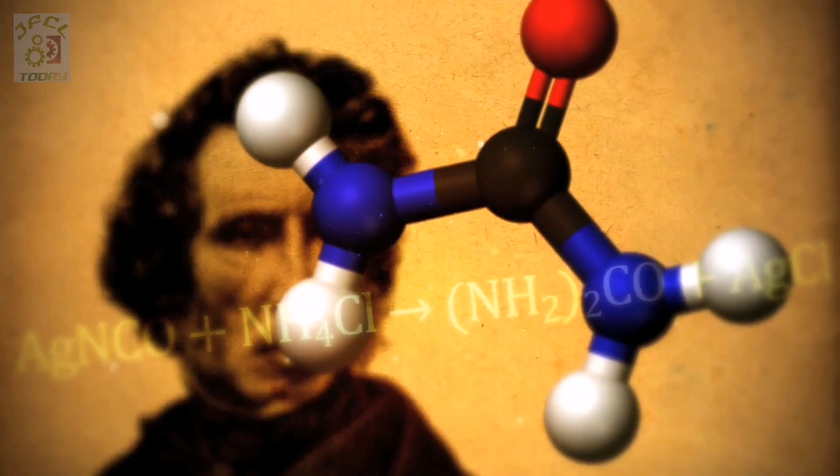In 1828, the German chemist Friedrich Wöhler obtained urea by treating silver isocyanate with ammonium chloride. This represented the first time that an organic compound was artificially synthesized without the involvement of living organisms. For this discovery, Wöhler is considered by many to be the father of organic chemistry.

BASF was the first company to produce urea on an industrial scale in 1922. However, corrosion of the steel equipment hampered the move to larger scale production. It was the Dutch DSM researcher Scheef van Waas who discovered that by adding a little oxygen to the ammonia-carbon dioxide mixture, the problem of corrosion was largely solved. This passivation procedure was patented in 1954. Hence, DSM's licensing arm, Stamicarbon, established its name in the urea industry.

Today, at around 170 million tons per year, urea is one of the world's most produced chemicals. Around 90% of the world's urea is used to fertilize soil for agriculture, and more than a third of all food grown in the world is grown from soil fertilized by urea.

Global demand for urea is growing at an average of more than 3%, higher even than the rise in global population. The available arable land, however, has not grown since 1960, yet the average crop yields per hectare have increased greatly. In fact, the average cereal yield per hectare in Europe has tripled since 1960, in large part thanks to fertilizers like urea. Furthermore, the growth of non-food applications for urea has also boomed in recent years.

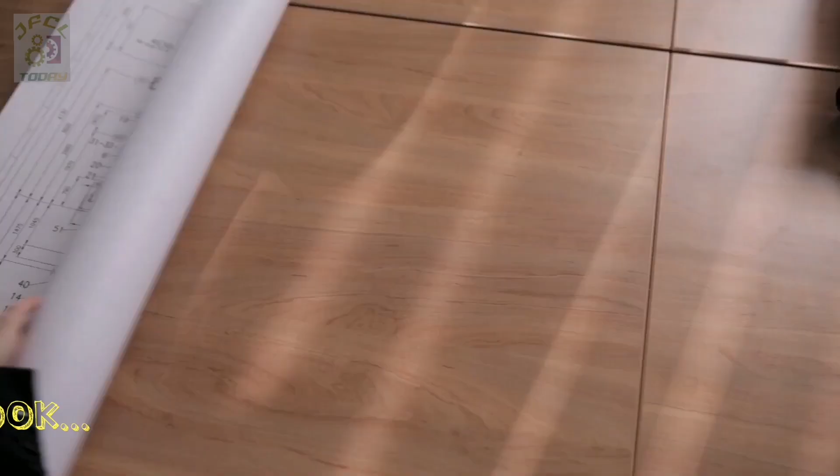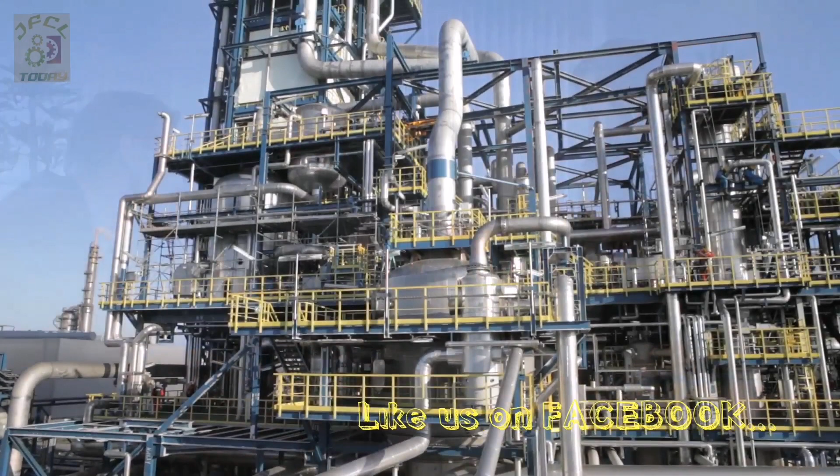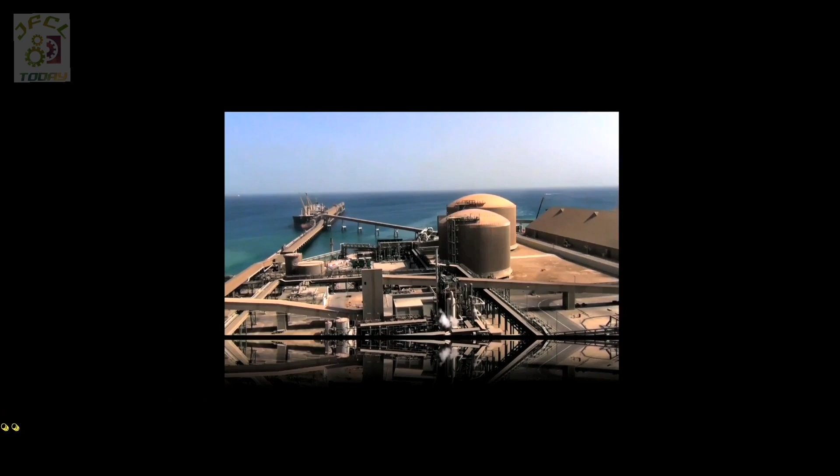Stamicarbon is the global market leader in the development and licensing of urea technology. With more than 50% market share, we deliver technologies and services to all of our customers worldwide. One activity is the licensing of new urea plants, providing the urea producer with knowledge and resources to build a reliable, state-of-the-art, low-cost and profitable urea plant that requires minimal staff to operate. Another activity is revamping or debottlenecking existing plants, along with improving efficiency and reliability.

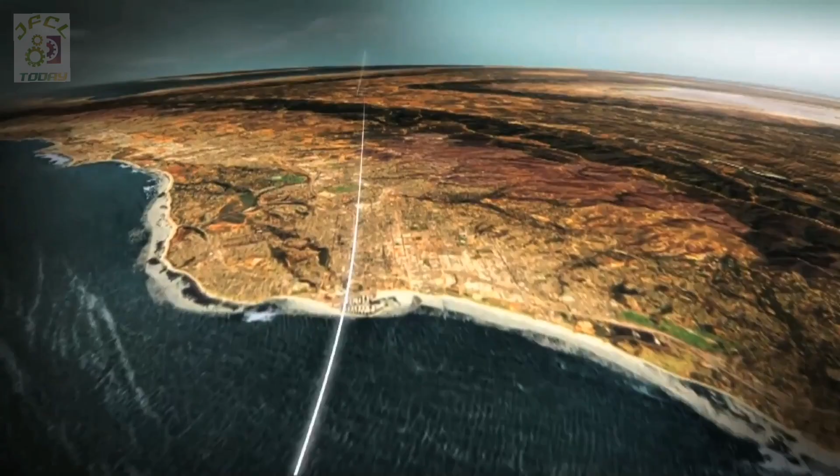Stamicarbon was established in 1947 as the licensing subsidiary of DSM. In 2009, the company was acquired by Maire Tecnimont, which is an engineering, main contracting and technology licensing group. Maire Tecnimont operates worldwide in the oil and gas, chemicals, fertilizers, petrochemicals, power, renewable energy and infrastructure sectors. The group has 5 different companies. Of course, one of them is Stamicarbon. The other 4 are Tecnimont, Tecnimont KT, Tecnimont Civil Construction, and Met New Energy.

Headquartered in Milan, Italy, Maire Tecnimont has over 50 operating companies in more than 30 countries and employs some 5,300 employees. Stamicarbon is the licensing and IP center of the Maire Tecnimont Group. In 2010, we established the Maire Tecnimont Innovation Center, which is responsible for the innovation within all the different companies of the group and steers the research and development in these companies.

Stamicarbon's main office is in Sittard, the Netherlands. The company also has offices in China and Russia and uses representatives and the sales offices of the Maire Tecnimont Group. The company has more than 65 years of licensing experience and has licensed various technologies to more than 1,000 companies in about 80 countries worldwide. Stamicarbon has licensed over 250 urea plants located in more than 50 countries and has completed over 90 revamp projects in both Stamicarbon and non-Stamicarbon plants.

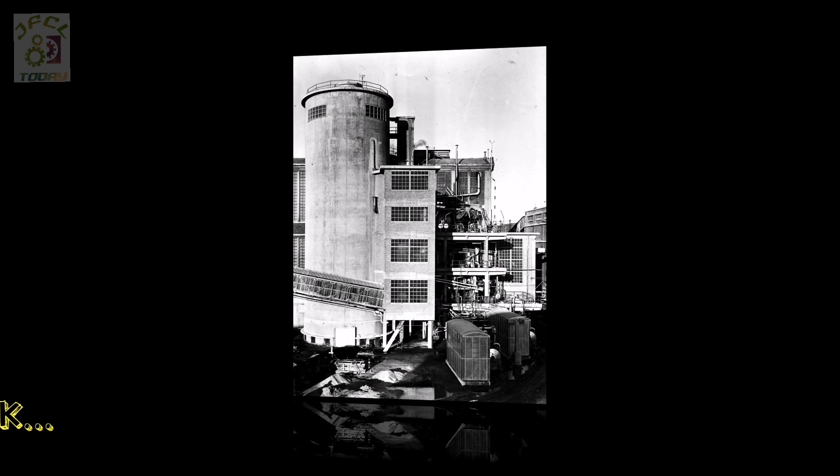Whereas in the 1950s, plants could be built for capacities as small as 50 tons per day, these days plants are typically built for capacities in the range of 3,000 to 4,000 tons per day. All projects entail customized solutions, with the choice of several licensing models and EPC supply scopes, meeting the diverse requirements of our customers.

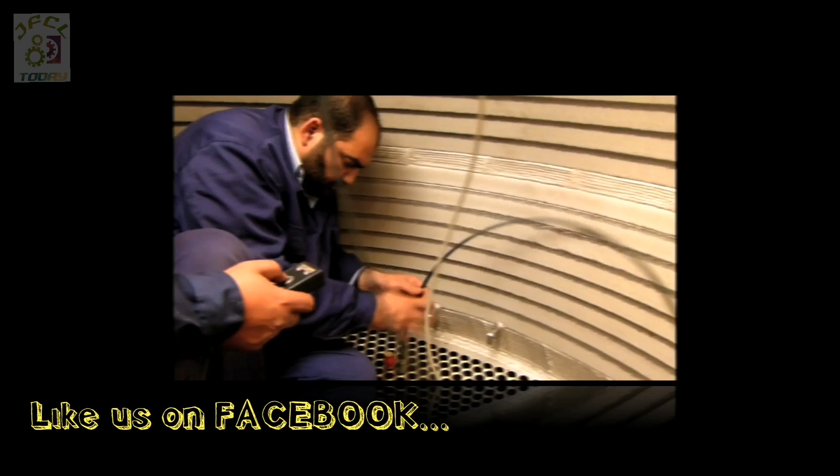I think that if you ask for one particular distinguishing feature that we have in our company in comparison with our competitors, then it would be the commitment that we have towards full life cycle support. Full life cycle support covers an array of services, including plant operation support, plant troubleshooting and optimization, studies and execution of revamp and debottlenecking projects, equipment inspections, and plant staff training.

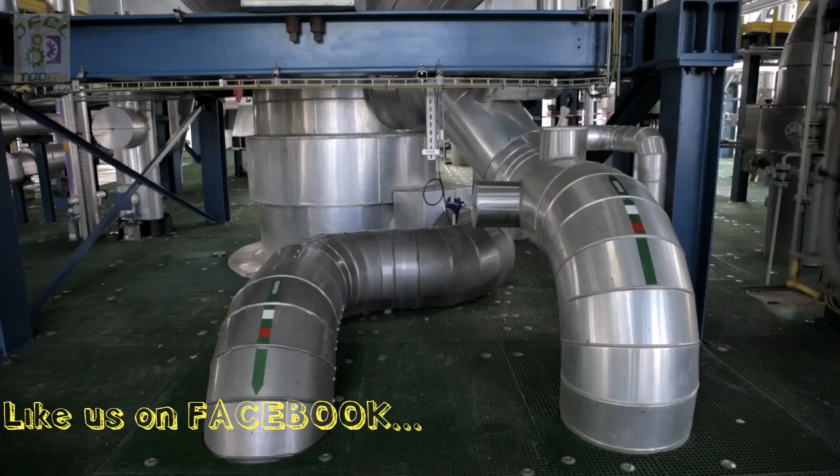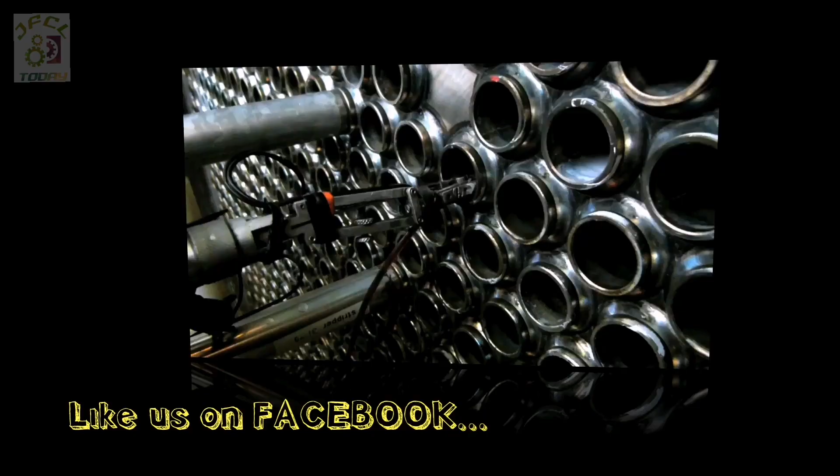Reliable equipment is very important for successful urea production, and Stamicarbon's expertise in design, engineering and the manufacturing of high pressure equipment in the field of urea production has led to the development of Stamicarbon stainless steel. This stainless steel is developed dedicatedly for the use in high pressure synthesis sections in urea plants.

Since Stamicarbon's formation, innovation has always been part of the company's DNA. Stamicarbon has been a constant frontrunner with a series of innovations, most notable of which are CO2 stripping technology, Urea 2000 Plus technology, Avancore technology, fluid bed granulation technology, and Stamicarbon stainless steel.

Many innovations take place in close collaboration with Stamicarbon's customers, suppliers, and contractors. It's not that we do these innovations all by our own. We work closely together in our innovation efforts with suppliers, EPC contractors, and our customers as well.

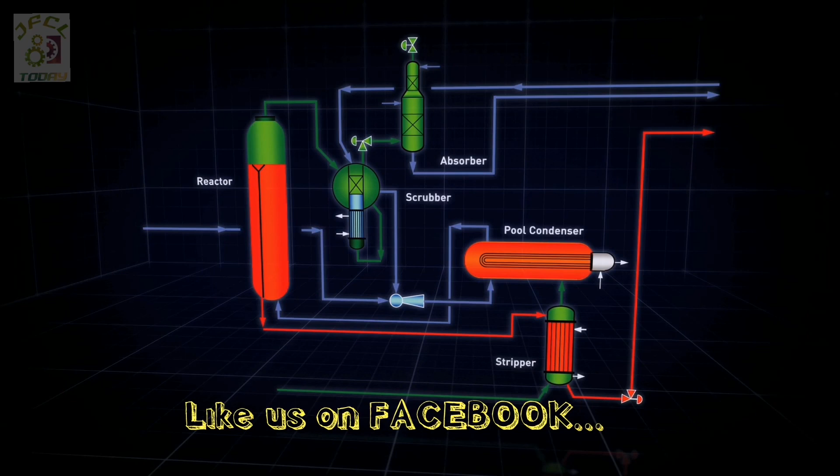The CO2 stripping technology, developed in the 1960s, was a major breakthrough in urea technology, almost halving the energy consumption of urea plants. The next major innovation was the development of the Urea 2000 Plus technology, featuring a pool condenser or pool reactor as a centerpiece.

Pool condensation entails superior heat transfer and easier condensation, taking place inside the same equipment, where further reaction to urea happens. Urea 2000 Plus limits the number and sizing of high-pressure equipment and piping used in the synthesis section of a urea plant, simplifying both the design and construction and leading to a considerably lower investment.

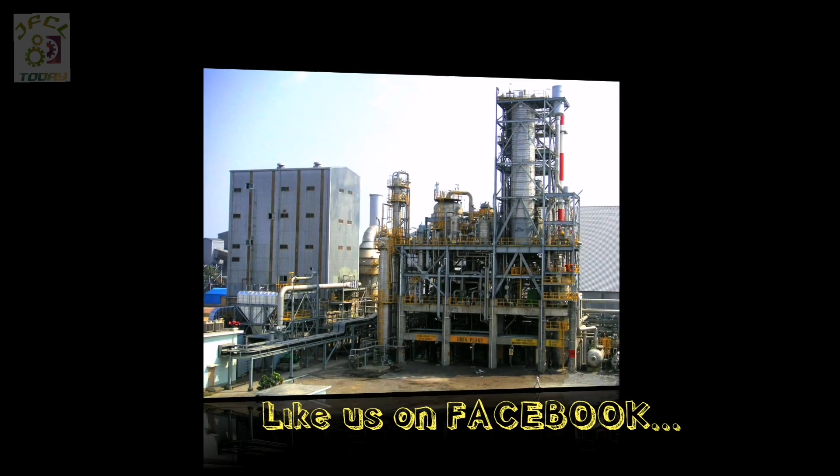In cases where a Urea 2000 Plus plant features a pool condenser, the total plant height is reduced to a mere 42 meters. In 1994, the first pool condenser was successfully commissioned at the KAFCO plant in Bangladesh.

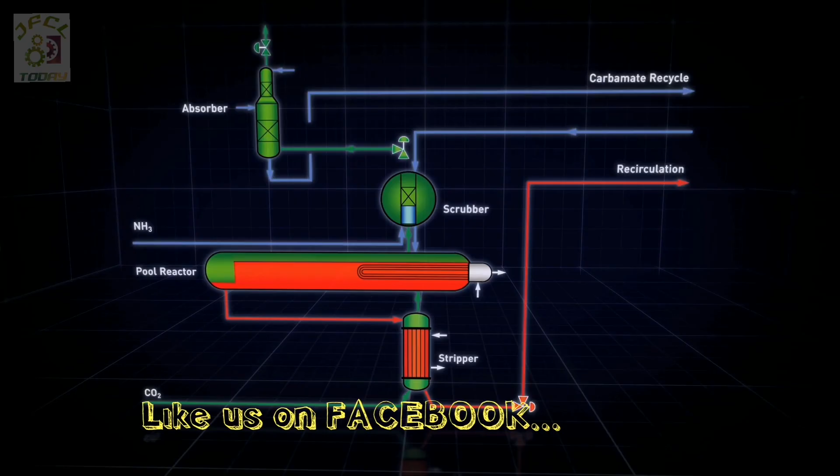Where a Urea 2000 Plus plant features a pool reactor, the condenser and reactor are combined in one single vessel. This is achieved by enlarging the horizontal condenser to create additional reactor volume, achieving sufficiently high residence times and eliminating the need for a separate vertical reactor. This way, the total plant height is decreased to a mere 30 meters.

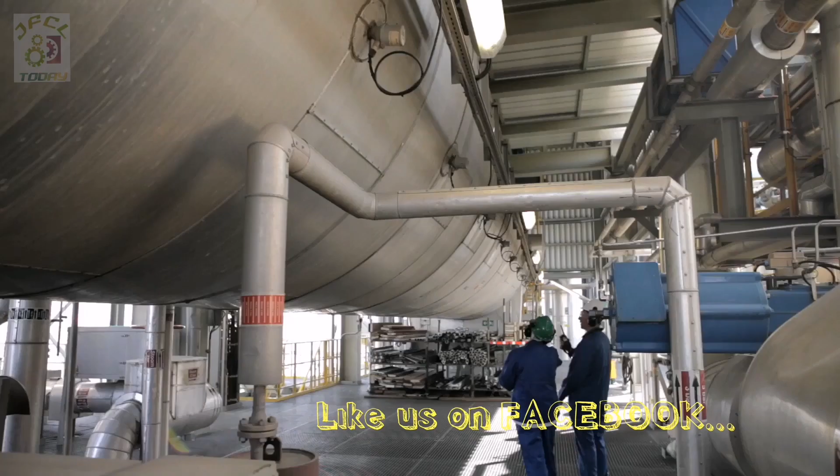In 1998, the first pool reactor was successfully commissioned at the former DSM plant, now owned and operated by OCI Nitrogen in Geleen, the Netherlands.

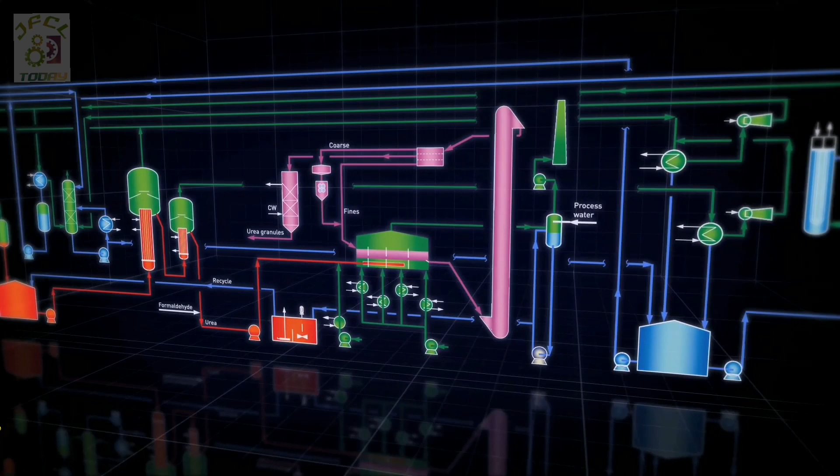Stamicarbon's latest development in urea technologies is the Avancore technology, which comprises all the benefits of the Urea 2000 Plus technology and experiences gained from revamp projects, around a low elevation layout of the synthesis section and a reduced pressure inert washing system.

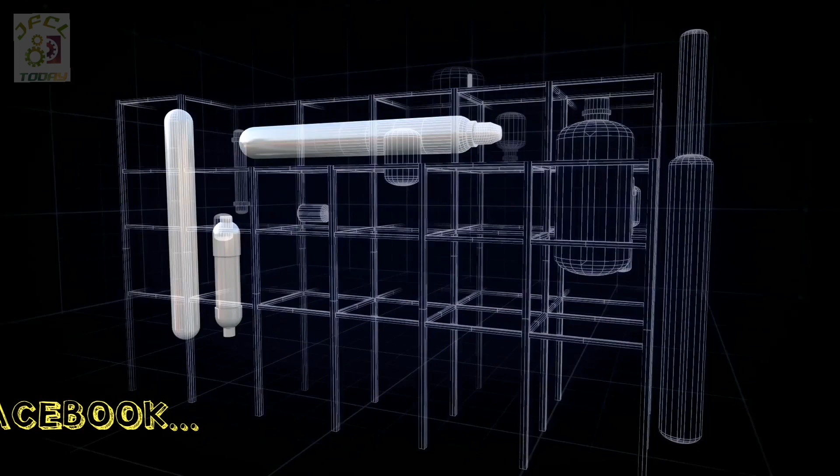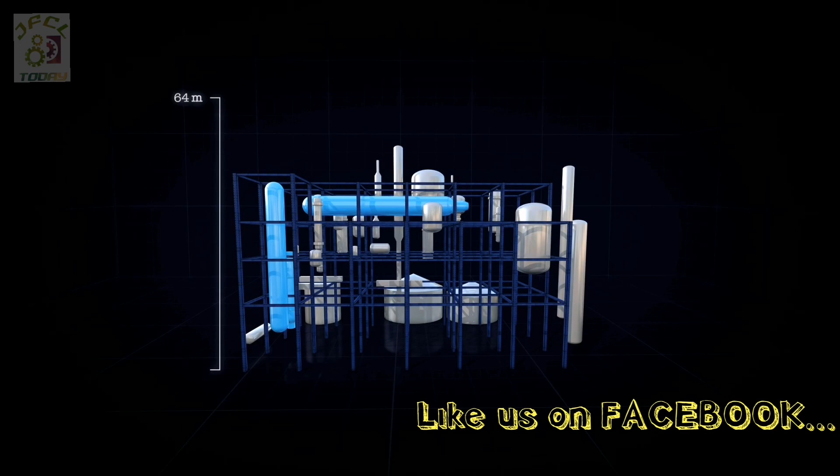For large capacities, the Avancore process features a pool condenser with a vertical high-pressure reactor based on ground level. For urea plants up to medium capacities, the Avancore process is also available, featuring a pool reactor only. The Avancore process reduces the required plant height to a mere 25 meters, obviously bringing down investment costs considerably.

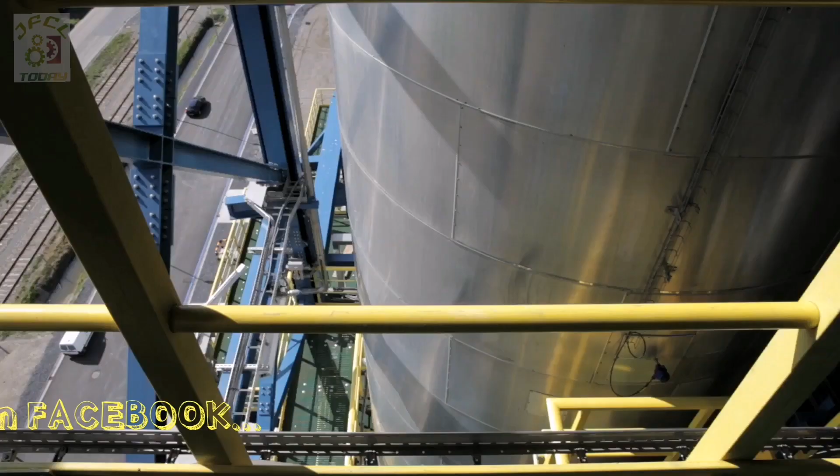The Avancore technology was first licensed to Tierra del Fuego Energía y Química in Rio Grande, Argentina in 2010. Today, many plants are designed for capacities of almost 4,000 tons per day. Larger capacities remain interesting for their economy of scale benefit.

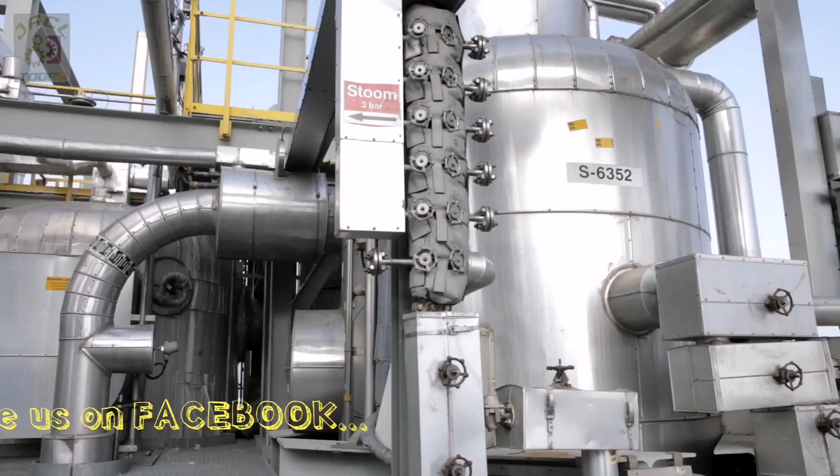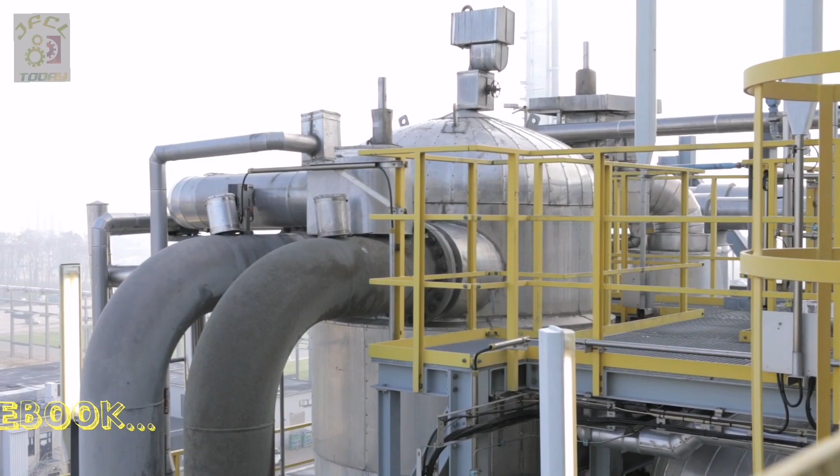All Stamicarbon synthesis technologies have been validated for 6,000 metric tons per day, and all equipment can be made available for this capacity. However, there are some customers who still would like to see the equipment sizing, particularly the high-pressure equipment sizing, to be minimized, or the number of this equipment to be minimized. For diverse reasons, you could think of the geographic location of the plant to be built, giving cost to that, or simply because the customer needs a minimum high-pressure equipment associated cost.

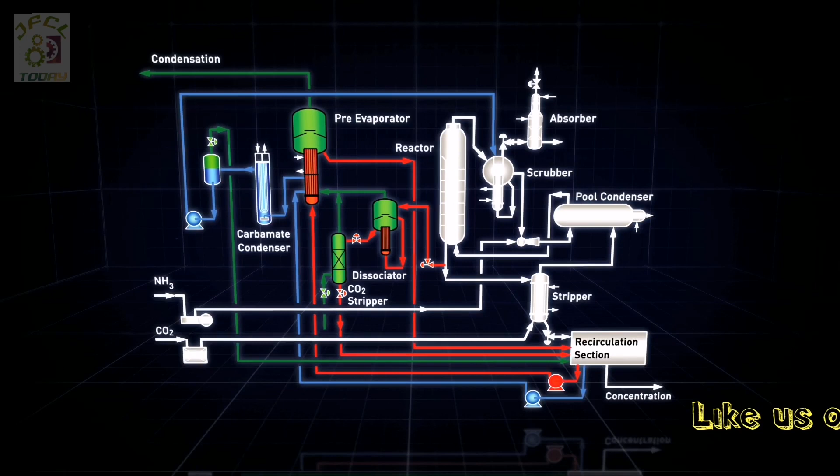In these cases, Stamicarbon's mega technology also allows for production capacities of up to 6,000 metric tons per day to be achieved in a single line, while keeping the sizing of the required high-pressure equipment and lines no bigger than the size for a 4,000 metric tons per day plant. The mega technology has been proven in a number of debottlenecking projects already. It can be used in combination with the Avancore or with 2000 Plus technology.

From the early 1960s, Stamicarbon was involved in the development of better materials to resist corrosion, which has always been a major problem in urea synthesis.

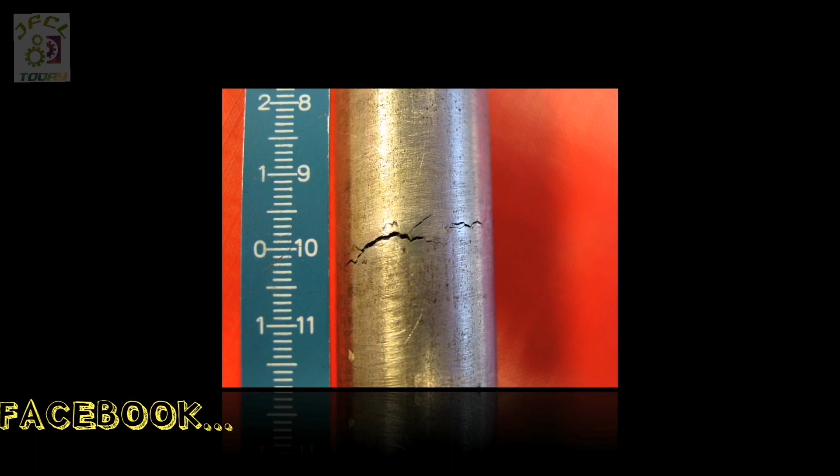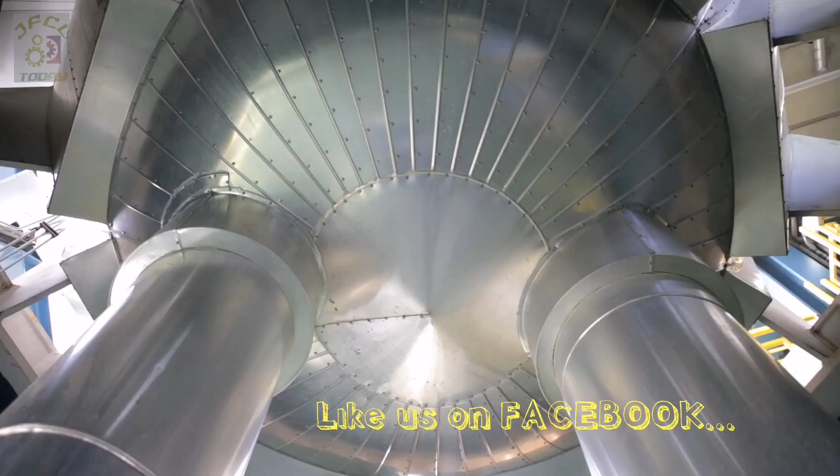Stamicarbon and the Swedish Sandvik Materials Technology jointly developed Safurex, a special duplex steel grade that is corrosion resistant at a low oxygen intake and resistant to stress corrosion cracking. Furthermore, it has good weldability and superior mechanical strength.

Safurex allows for drastically reduced oxygen intake, lower investment, and virtually maintenance-free static equipment.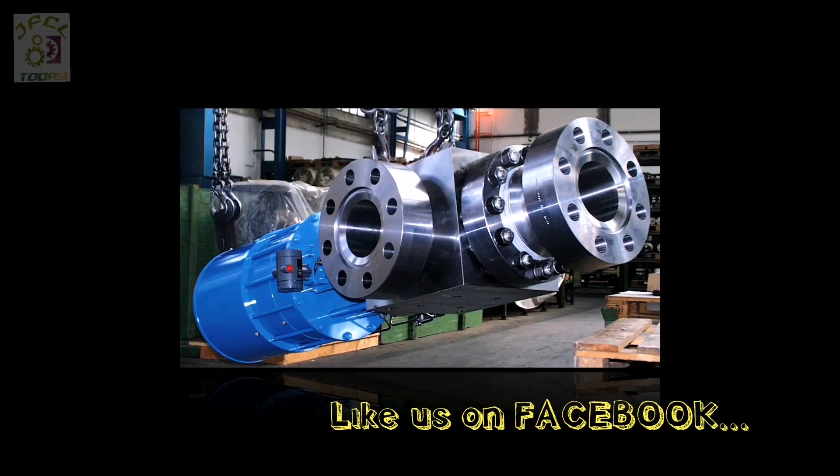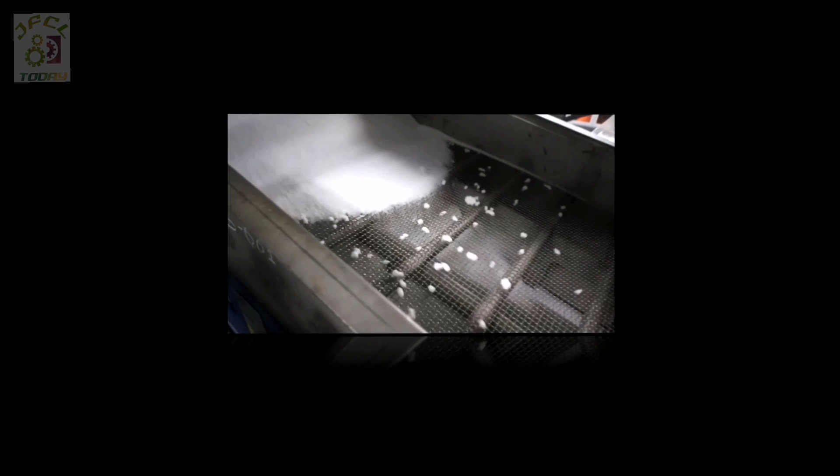Today, the most commonly used finishing technology in urea plants is fluid bed granulation technology, and Stamicarbon has a fluid bed granulation technology of its own. The key success of the Stamicarbon fluid bed granulation technology is the urea film spraying nozzle. This technology requires the lowest possible use of urea formaldehyde solution and allows for unbeaten, uninterrupted runtime, hence enabling great operational cost saving. The technology also delivers a superior product that complies with all required quality and environmental standards.

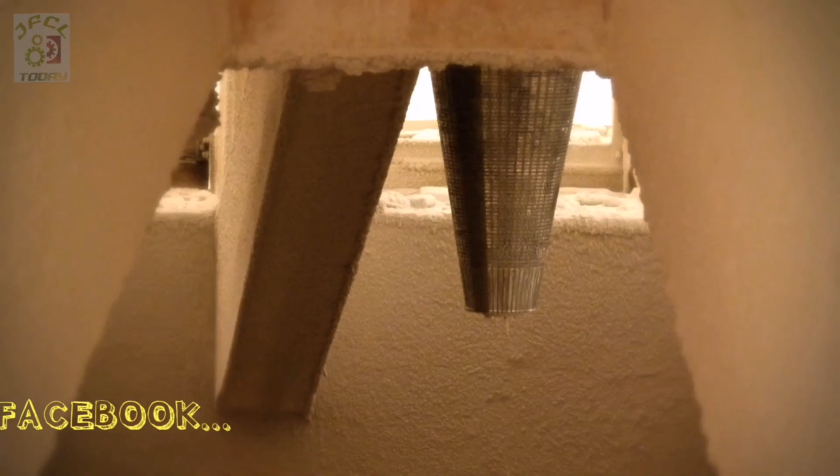Prilling is another finishing technology widely used. The urea melt is prilled with the aid of a rotating prilling bucket. The urea melt droplets fall down in a tower while crystallizing into prills.

For Stamicarbon, safety, health and environmental awareness is a precondition of innovation and a key condition for sustainable licensing. One example is the wastewater treatment section in Stamicarbon's plants, which produces clean water without a wastewater stream.

Another example is the ongoing development of processes for the production of enhanced release fertilizers and urea that needs less coating and has better properties for release of urea and nutrients, and therefore it is altogether much better for the environment.

Innovation is our lifeline to the future, really. We continuously pursue new technologies and new business ideas, and in order to employ a systematic approach for assessing these embryonic ideas, and to get to the commercialization of the best ideas, we make use of the innovation pipeline methodology. This efficient way of working has already led to a constant stream of innovations and registered patents.

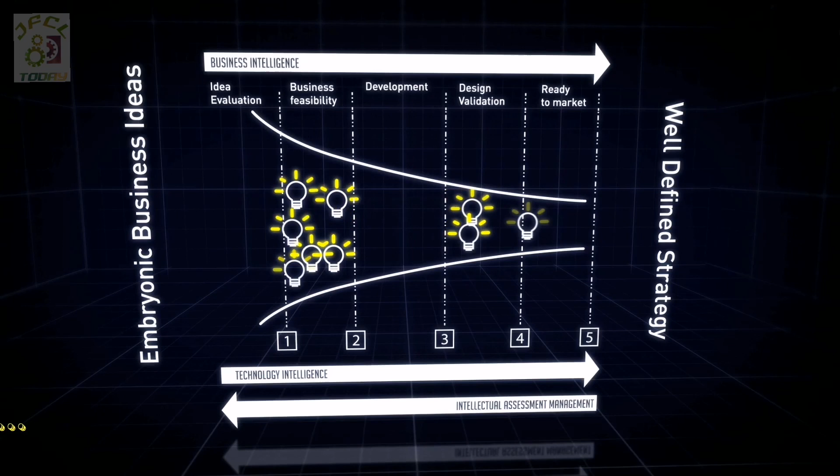Stamicarbon's history shows that in a licensing business, survival and growth depend on three capabilities. First, its ability to strategize and adapt to the changing business environment. Secondly, its innovative drive to fulfill the requirements of its customers. Thirdly, its people's ability to work and collaborate with a network of partners, suppliers, and customers in developing and implementing new technologies.

Looking into the future, I am quite optimistic. The growth of urea as a fertilizer is slightly more than the GDP and the growth of the population. Currently, this means about 6 new plants that have to be built every year, and this ensures our new and future business.

Next to this, we have started with the Micro-Technology Innovation Center, which is developing new technologies to be licensed in the future. The combination of this with a very experienced, skilled and enthusiastic team of people that we have makes it that I have all the confidence in the future of Stamicarbon.